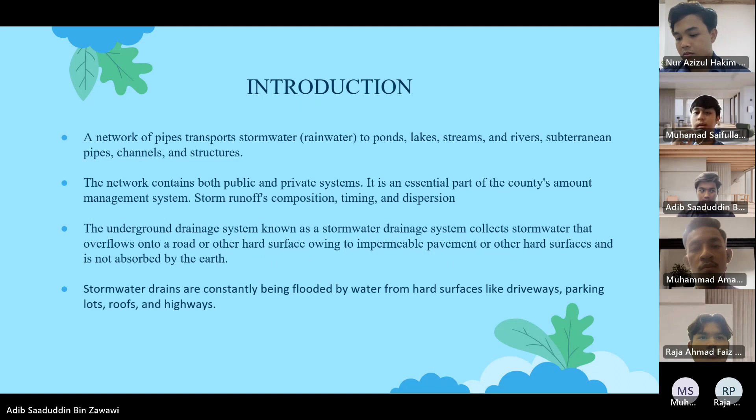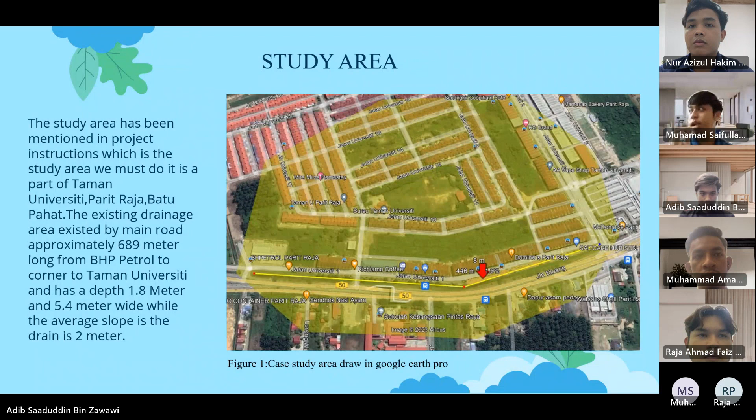Usually, an open channel, the system is often a secondary drainage system. It is connected to our tiny drain. As you can see, continuing from the main drain, we have a smaller drain connecting to maintain the flow of the water.

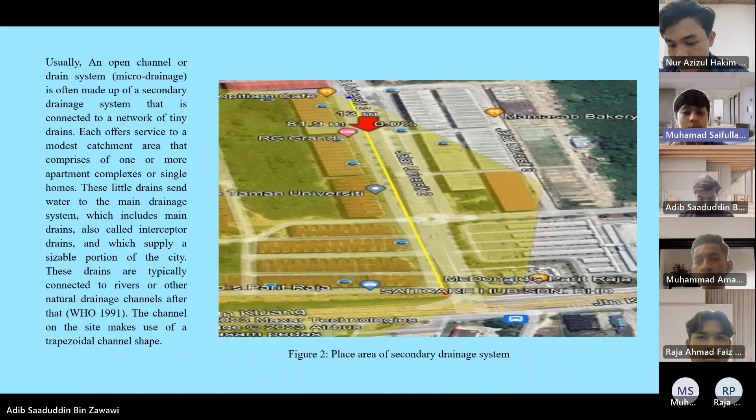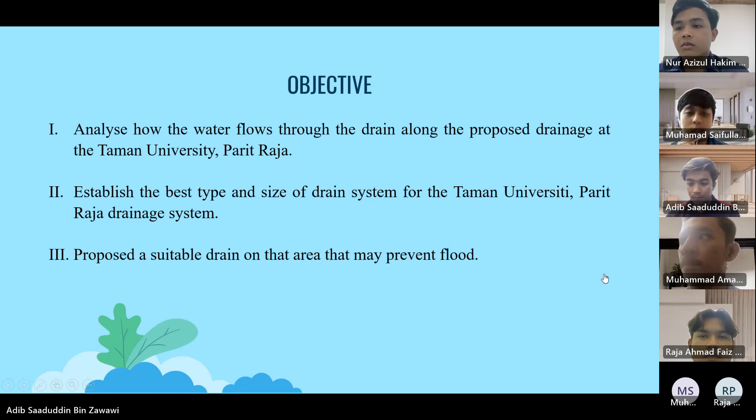For the problem statement, we have two problem statements. Number one, the size of the flow channel is not suitable for the area and needs to be analyzed, especially in designing the storm drainage system. Number two, the drainage system was not designed properly to mitigate flooding from the road. This is a photo of a flash flood at Taman University.

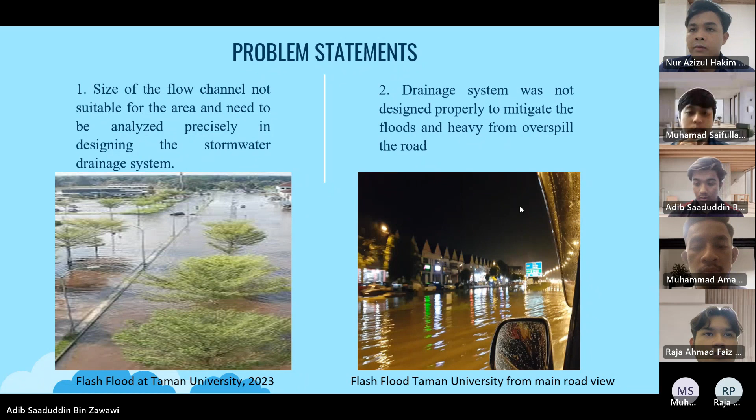For the methodology, the task given to us is to complete the drainage design manually for part of Taman University Parit Raja, and to propose a suitable drainage design. A suitable analysis method was used to design for the area, climate, and condition. Through the information given to us, the area was prone to inundation due to flash flood, which occurs during short and intense rainfall.

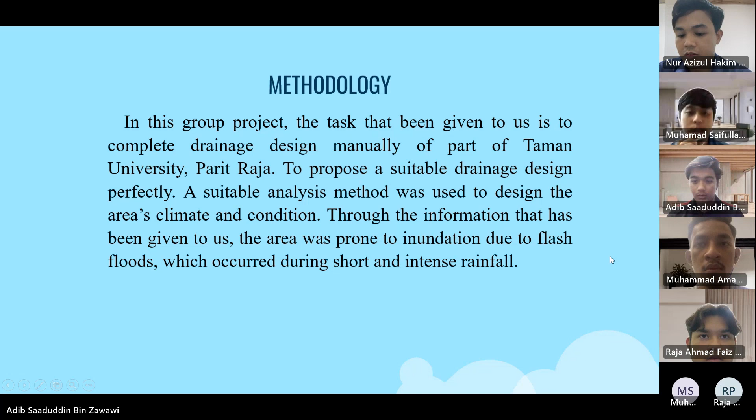For the catchment area, to get detailed information about the research catchment area, our team went to the area and collected data using Google Earth Pro, to get useful information for determining the suitable drainage. The catchment area was also calculated using the same website to get the area and dimensions of the desired area.

The total area of water is 34,1324 meters squared, which is equal to 34.1324 hectares. The rational method was used to properly calculate and analyze the data. The Urban Stormwater Management Manual for Malaysia was used to verify peak discharge for the area in meters cubed per second.

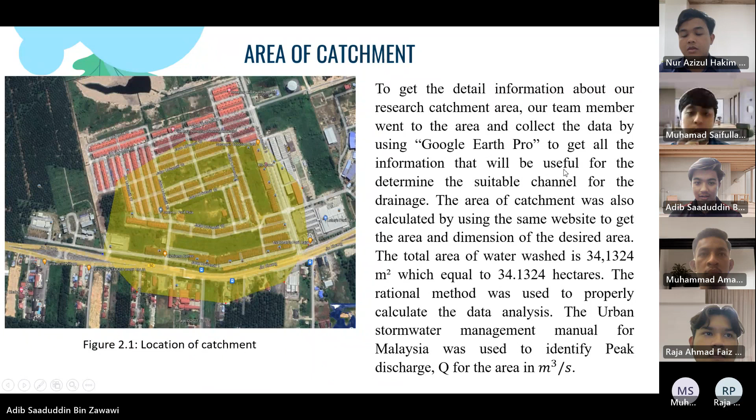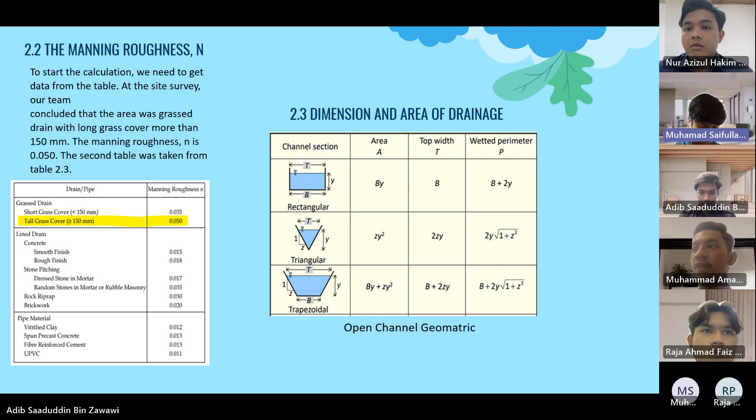Next, the friction slope, which was calculated using the friction slope equation. As a result, the value of the friction slope was 0.00289. The equation used the highest elevation value, which was 10, and the lowest elevation value, which was 8. The length of the channel was also required for the calculation. The formula is: S equals highest elevation minus lowest elevation, over the length of the channel.

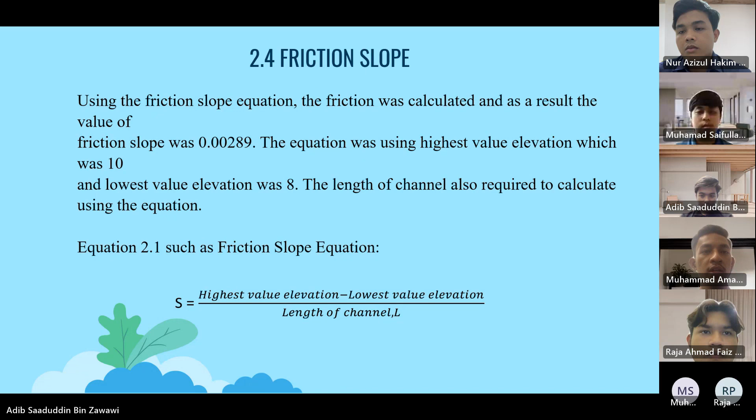Next, for the empirical IDF curve, the needed data was collected in the area in Johor, at the station near setor JPS Batu Pahat. From the area data, we can get the constant values: lambda is 64.099, K is 0.174, theta is 0.201, and eta is 0.826. This data was taken from table number 6, for setor JPS Batu Pahat.

In addition, the study area can be categorized into commercial and business, with a minimum return period per year of 100 years. So we assume T equal to 100.

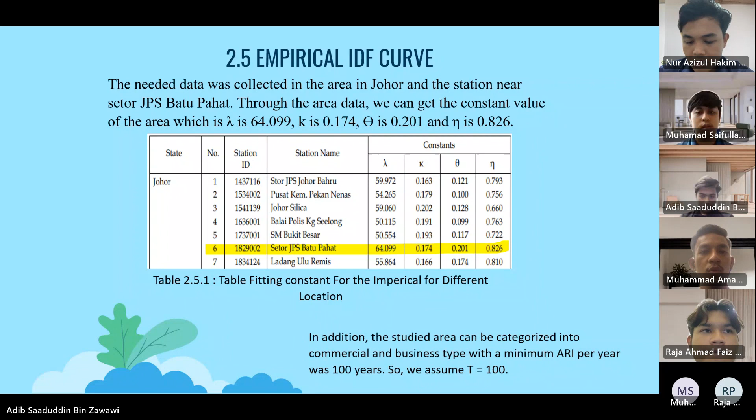Next, for table 2.5.2, the quantity design storm, we use a commercial and business center. So for the minor system it is 10, and the major system is 100.

To calculate the runoff coefficient and peak flow, we need to refer to table 2.6. The type of land use of the area needs to be chosen. The area's land use was commercial and business center, with a runoff coefficient higher than 10 years of 0.95. This value will be inserted into the calculation as C.

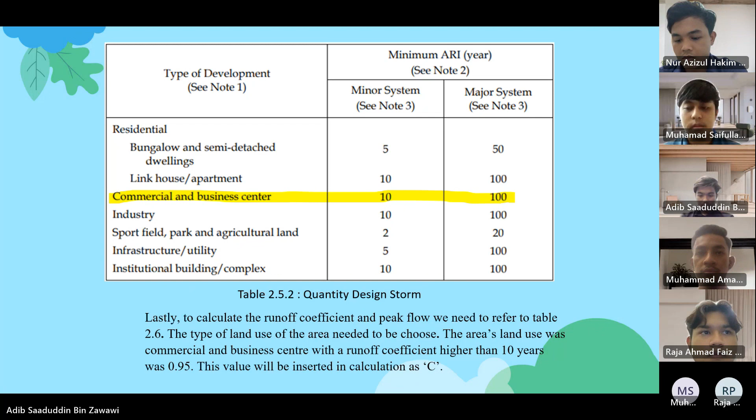For the peak flow, using a commercial and business center, it's 0.90 for the minor system and 0.95 for the major system. The formula is Q equal to C, I, and A, divided by 360.

After the last step of the rational method to find peak flow Q, we need to find the Q assumption for the new design of drainage. The Manning equation was used to calculate the Q assumption. Area, wetted perimeter, and the slope were calculated before we use the Manning equation. Then we proceed to calculate the Q assumption.

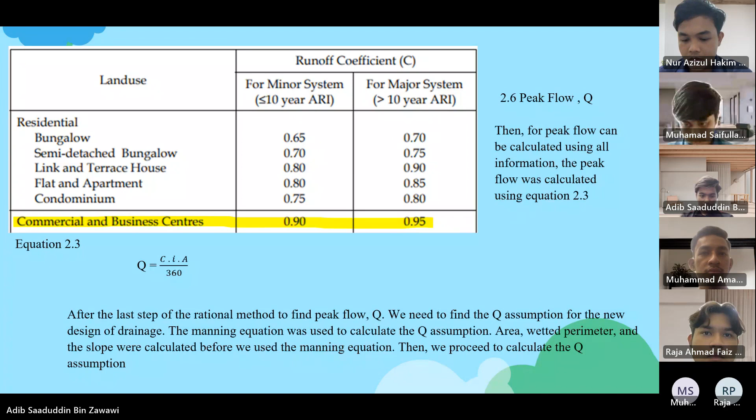Now we go through the results and analysis. Referring to the picture below, a survey in the study area was conducted to obtain important information using Google Earth Pro. Inspections were also made to study the direction of the flow of the drainage water and the causes of the flash flood in this area.

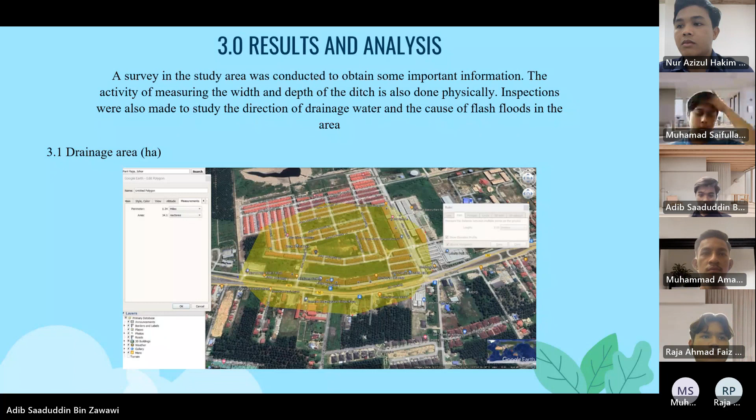This is the data from Google Earth Pro. From the left, the first is the first cross section of the channel, and the second is the second flow of the channel. From this data we can get the highest elevation and lowest elevation of the channel, and also the length of the channel.

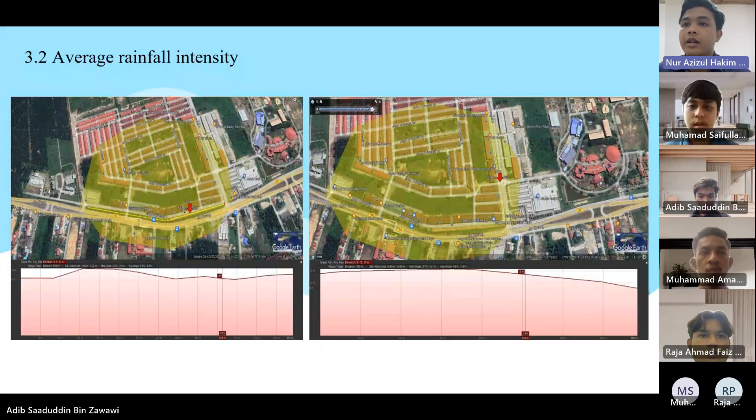Here we do the calculation to find the flow rate of the channel. First, we identify the data: B equal to bottom width, Y equal to depth of the water, and T for the top width.

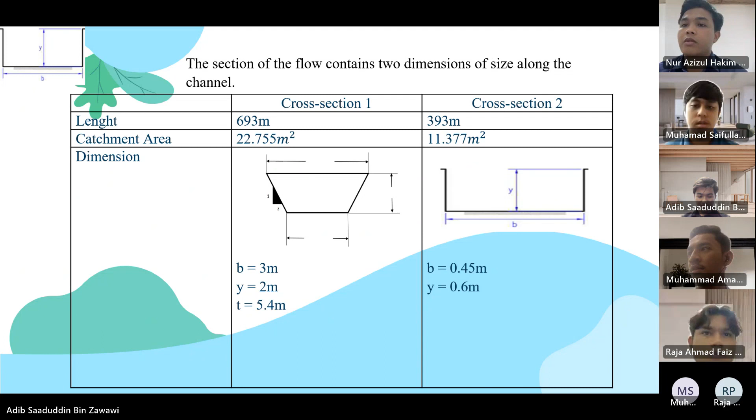For the first cross section, first we calculate the hydraulic radius by finding the value of area divided by wetted perimeter. After that, we find the friction slope for the channel, and we get 0.00289.

After that, we find D in units of hours using this formula. Then we calculate I using the formula given in the methodology, and we get 325.45 millimeters per hour. Then we get the flow rate using the formula Q equal to C multiply A multiply I divided by 360. We get 19.54 meter cube per second.

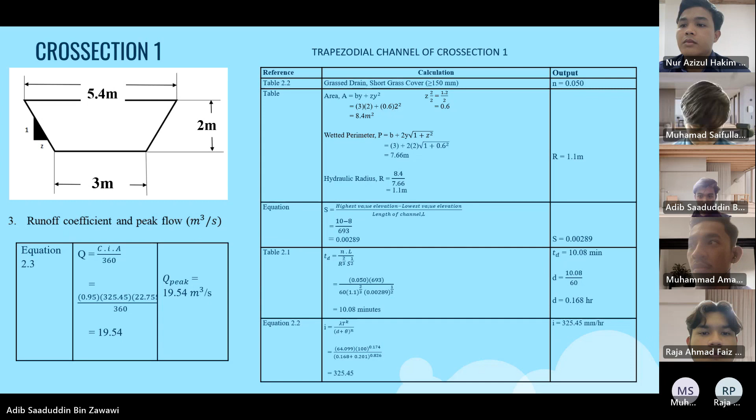We now go through the second cross section. For the second cross section, it has a rectangular shape, so we use the formula B multiplied by Y, and then find the hydraulic radius using area divided by wetted perimeter, and we get a radius of 0.164 meter. Then using the friction slope, we insert the data and get 0.0102.

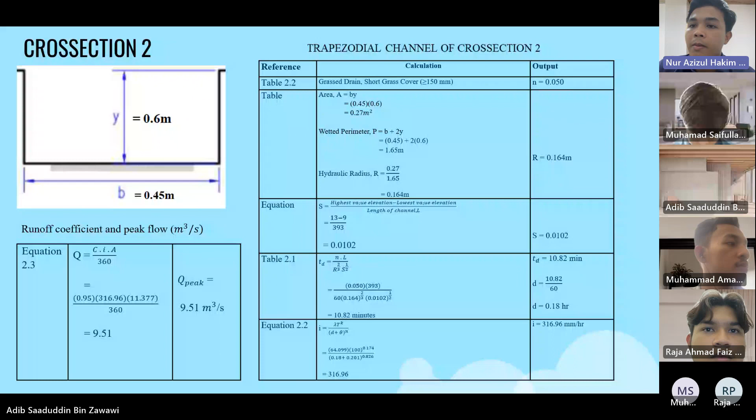Then using the formula to determine D, we get 0.18 hour. After that, we determine the I value using this formula and get 316.96 millimeter per hour. After obtaining all this information, we insert it into the calculation and get 9.51 meter cube per second for the flow rate of cross section 2.

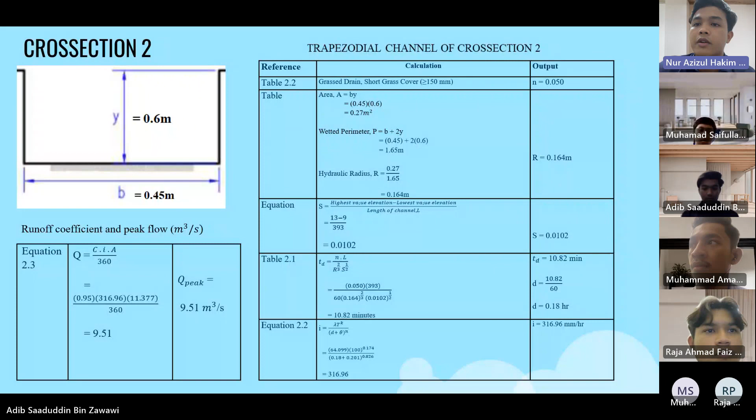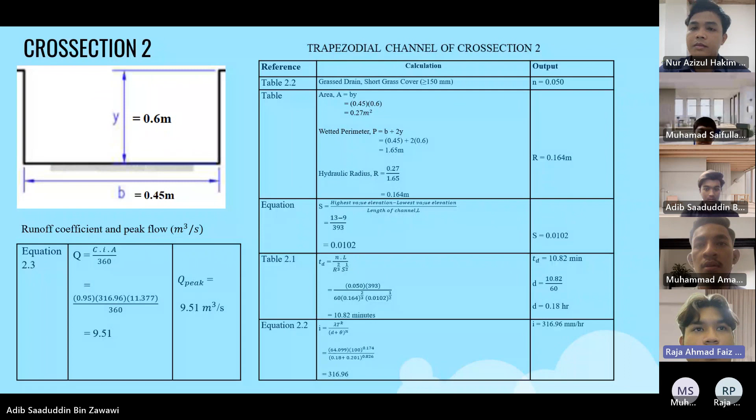For the proposed new design of the channel section, based on the calculation from cross section 1 and cross section 2 tables, the obtained data has been analyzed and shows that one factor involved in the flash flood in Taman University Parit Raja is that the area of the cross section of the drain is small and not suitable. Therefore, the way to prevent flash flood from occurring is to enlarge the size of the drain to let water flow smoothly during rainy days, so it can carry flow of water more than peak flow, which is 29.75 meter cube for cross section 1 and 28.55 meter cube for cross section 2.

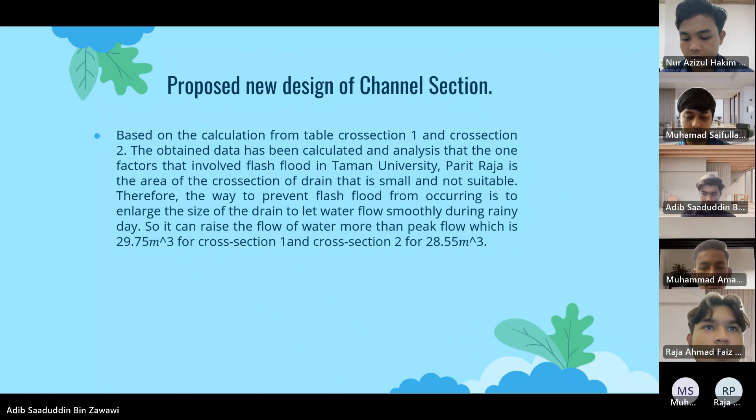For the cross section calculation, we use area A equal to B plus Z Y squared. We got 12.6 meter square. For Z, we use 3 over 3, Z equal 1.2 over 3, and we get 0.4. Wetted perimeter P equal to B plus 2Y.

root 1 plus Z squared. We got 9.46 meter. Hydraulic radius, we use R equal 12.6 over 9.46. We got

1.332 meter. For the equation, S equal highest value elevation minus lowest value elevation over length of channel.

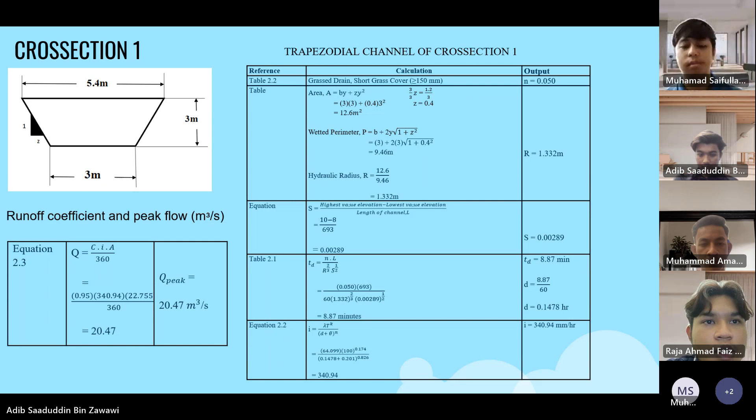We got 0.00289. And for table 2.1, we use TD equal NL over R to the two-thirds and S to the one-half. We got 8.87 minutes. For equation 2.2, we use I equal lambda TK over D plus theta N. And we got

340.94. And equation 2.3, we use Q equals C, I, A over 360, and we got 20.47.

And the output for the table, R equal 1.332 meter. Equation S equal 0.00289. Table 2.1, TD equal 8.87 minute. D is 8.87 over 60, and we got D

0.1478 hour. Equation 2.2, I equal 340.94 millimeter per hour, and Q peak equal 20.47 meter cube per second.

For cross section 2, we use the table area A equal BY. We got 1.67 meter square. Wetted perimeter P equal B plus 2Y. We got 3.98 meter. Hydraulic radius R equal 1.67 over 3.98. We got

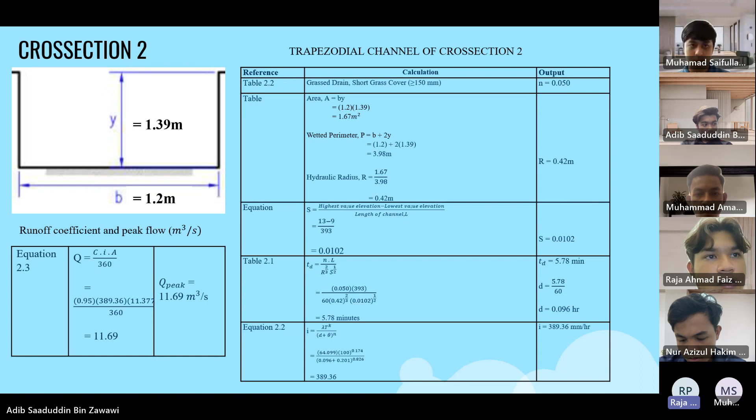We got 5.78 minutes. Equation 2.2, I equal lambda TK over D plus theta N, and we got 389.36. And equation 2.3, Q equal C, I, A over 360, and equal

11.69. For the output table, R equal 0.42 meter. Output equation S equal 0.0102. Table 2.1, TD equal 5.78 minute, and D is 5.78 over 60, and we got

0.096 hour. Equation 2.2, I equal 389.36 millimeter per hour, and equation 2.3, Q peak equal 11.69 meter cube per second.

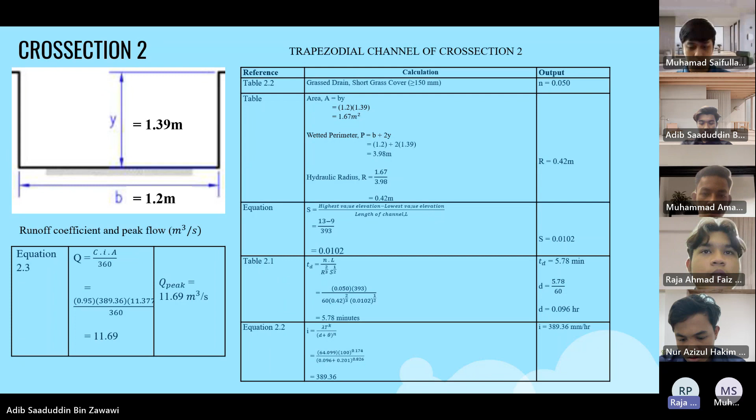For the discussion, after settling the calculation from the data that has been obtained, we notice the flow design discharge is higher than the flow peak discharge. The calculation includes both sections to get the satisfied result. The result for this project gets passed successfully because the flow rate for the new design is higher and more efficient

than the old. This is our table that we got for cross section 1 and cross section 2: area, depth, hydraulic radius, and flow rate. So the design is passed and suitable for use in construction to prevent flash flood from happening at the area of Taman University Parit Raja.

The first method that we use to measure the dimension of the drain was by using tape measurement, but we noticed that the soil strength nearby the drain was too weak and could be dangerous to us. Erosion of the soil could also happen with soil that has low bearing capacity.

For safety reasons, it was good to measure the dimension by using Google Earth Pro.

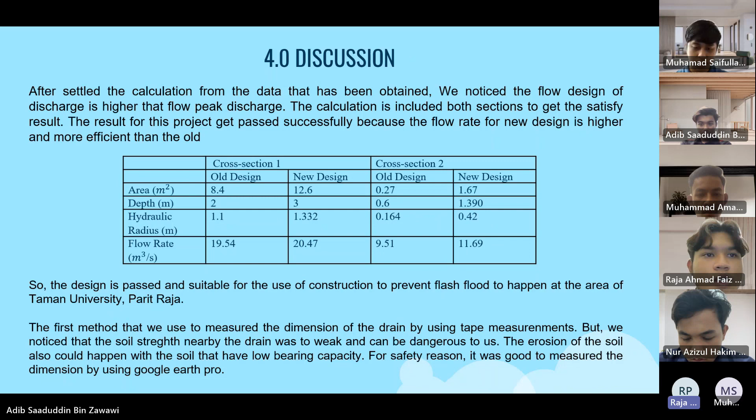In the case of this project, flooding was a frequent occurrence, particularly during the monsoon season. The drainage system at the project site is undersized and overly shallow, which caused the water to flow erratically, especially during the rainy season, when an excessive amount of rain is created. Therefore, in this subject, hydrology and hydraulic analysis is the area that receives the most attention.

Here we study Manning roughness, friction slope, intensity duration frequency (IDF), land usage type, and average recurrence interval (ARI), to calculate the drainage peak discharge as well as suggest the peak flow design for the on-site drainage.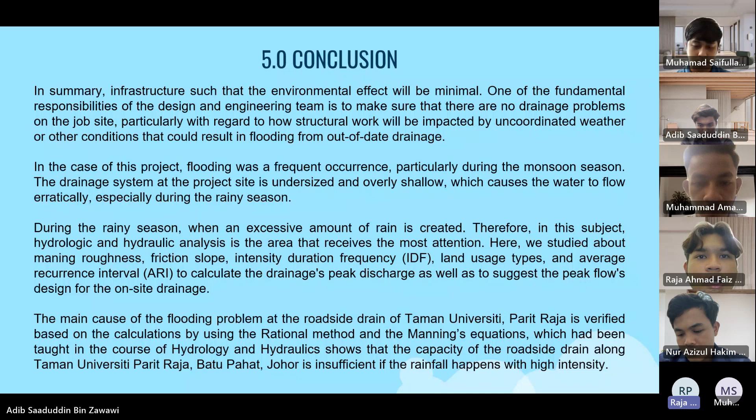The main cause of the flooding problem at the roadside drain of Taman Universiti Parit Raja is verified based on the calculation using the rational method and the Manning equation, which has been taught in the course of hydrology and hydraulic. This shows that the capacity of the roadside drainage along Taman Universiti Parit Raja, Batu Pahat, Johor is insufficient if rainfall happens with high intensity.

That's all for our presentation. Thank you.